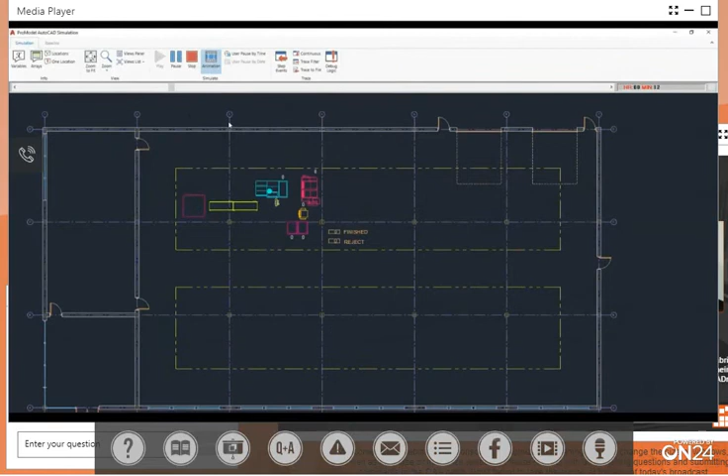So once the route is created and the flows are determined and the values have been added, you can use a tool called Simulate on the ProModel ribbon. This will actually simulate the route of that part or material going through the various stations. And in this case, finished and reject criteria have been set up.

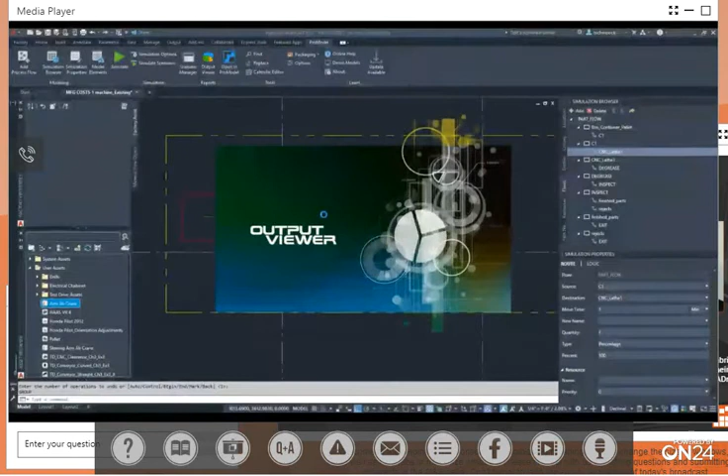I'm going to fast forward this to the end because I want to be able to lay out the various charts to get information that I can evaluate. So in this case, an output viewer will open, and charts can be created to suit the need that you have for identifying the proper information that you are trying to establish. And those charts are created using this tool right here.

So another simulation will be created adding a second lathe. We'll look at the results, and then we'll evaluate the results.

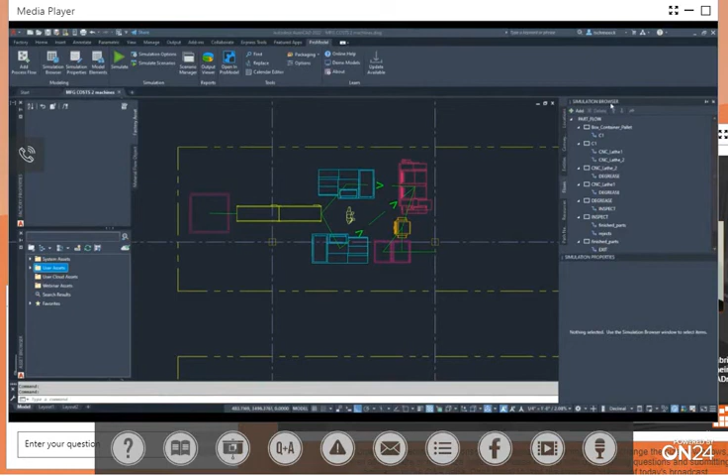The proposed layout of the two CNC machines has been completed. You can see the second machine is now added, and the paths have been adjusted. In the ProModel simulation browser, the second lathe has been added. The values have been adjusted.

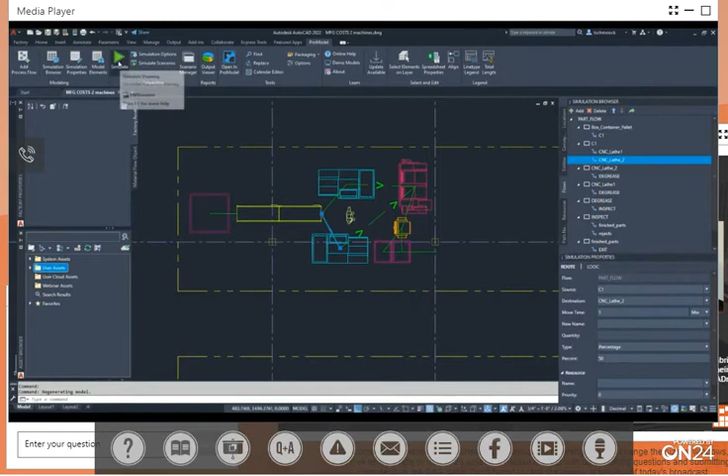So, for example, in CNC lathe 1, the percentage is now down to 50, and on lathe 2, the percentage of parts going through it is now at 50. Now that that is all done and any other adjustments were made by adding the second machine, on the ProModel ribbon, I can go simulate it using the Simulate tool.

ProModel shows the parts running through the route. The finish and the reject counts are being adjusted and displayed as the simulation progresses. I'll fast forward the simulation just like I did the last time so I can get to the simulation results.

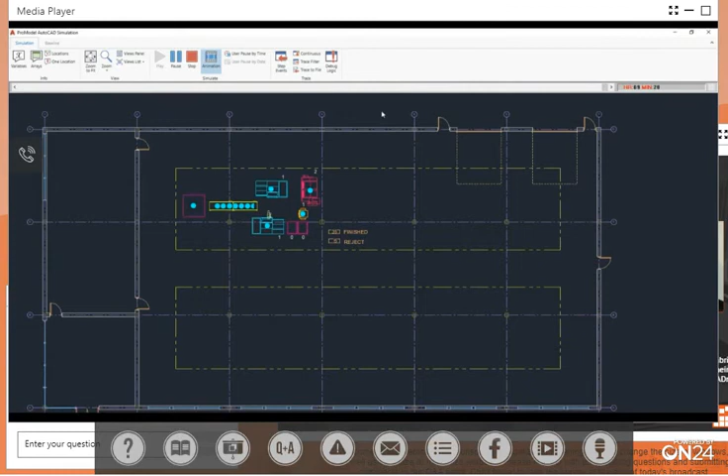The output viewer displays, and just like in the scenario where we had one machine, the same charts have been displayed, so now I can compare the results of the two simulations and evaluate whether adding the second CNC machine gives us the desired part output.

Now that we've run the simulations, we can open up our output viewer and look at both simulations on the same screen. By coming here to File and going to our data source, we can add our data source for the single CNC machine as well as the run with two CNC machines.

Now, looking at our report data, as we can see by comparing the two different results, we can start seeing how the second CNC machine, though we thought our operation percentage would increase, actually decreased, and we have increased our percentage of block time from a 26% rate to a 30.5% rate.

So let's look at the single capacity of the location. Right away, we can see that both of our box containers in Simulation 1 and Simulation 2 are very high, and we saw that while watching the simulation stack up on the conveyor belt.

But as we look, we can actually see that we have only decreased the percentage of block from 65% down to 64%. So it was only a 1% difference from adding a second CNC machine.

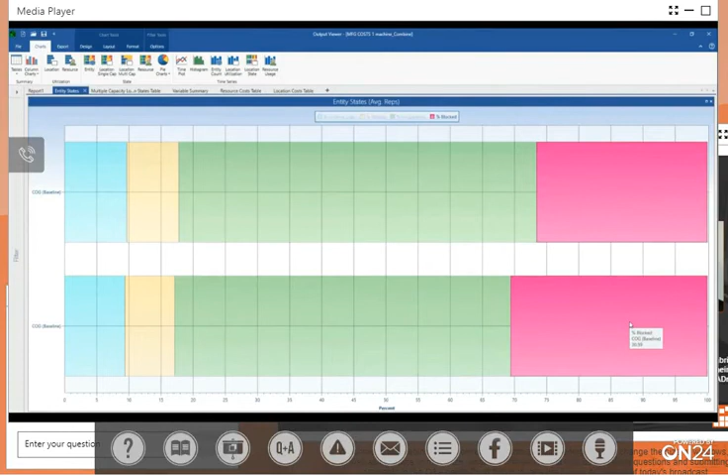Let's take a look at some states our machines were used to see what kind of usage they've got. If you notice our degrease portion of the process, it is only full 85% of the time. Only 12.21% are the parts occupying it, and the machine is empty 2.79%.

We come over here to our check system, and our check system is never full. We have 97.27 parts occupied at all times. So in other words, this is probably holding us up for the inspection.

So maybe what we need to do is add on a second person to the inspection site to alleviate some of the blockage. Now, one other thing I want to look at is our variable summary.

I want you to realize that when we only had one CNC machine, we produced 47.6 units, and we only had 6 rejected. When we added the second machine, it actually decreased our production rate, but it also decreased our rejection rate.

So in this case, we can start seeing how the resource of having just one operator doing the whole process might be overtaxing. But the other thing we need to look at is in our inspection or degrease process, we might want a different process here, or maybe add a station to help alleviate some of the blockage the CNC machines are causing. This might be what we need to increase productivity, yet keep our costs down.

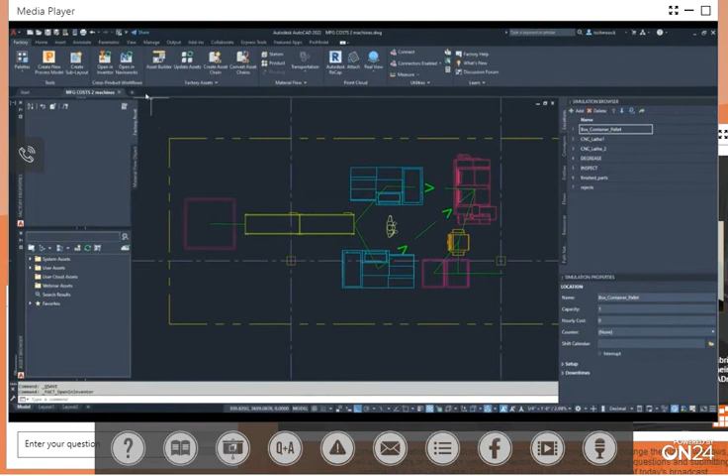So far, everything has been completed in AutoCAD. If you feel more comfortable working with Inventor, the factory layout can be completed in Inventor and opened in AutoCAD at any time. In this case, I started with AutoCAD, and I would like to open it up in Inventor. So there's a tool up here on the factory ribbon, Open in Inventor. Inventor will start, and it will create the factory layout as it was created in the AutoCAD software.

So you can see the factory floor now is displayed here in Inventor. The same CNC machine that I picked on last time, if I click that, you will see the factory properties displayed, the same factory properties that were shown in AutoCAD: the door open, true or false, and parameters for height, length, and width.

The same asset browser with the assets that were available in AutoCAD are available here: system assets, the ones that were out of the box, and all of the options you had there, and user assets, the ones that you would publish to. In this case, I have favorites created and populated with items I use on a regular basis. So maybe I want to take a fork truck from my assets and drag and drop it into my factory floor. I position it in the location and orientation that I want, and I can continue to add assets, dragging and dropping them where I need them.

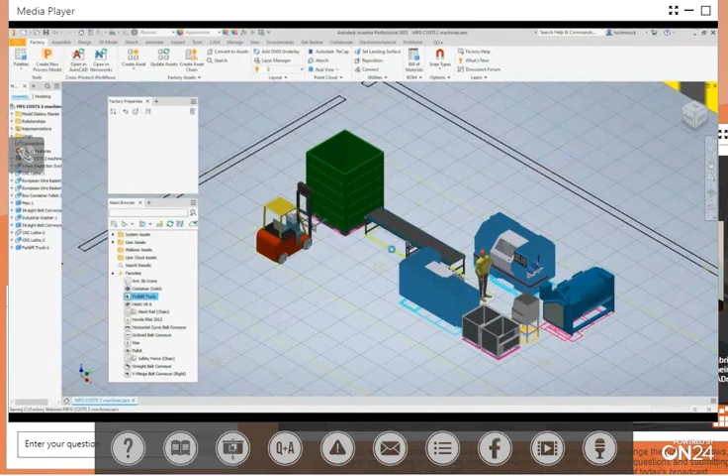When I'm ready, I can go back to AutoCAD at any time, so I'll use the tool Open in AutoCAD. The layout will need to be saved. And now we are back in AutoCAD, and you can see the fork truck has been added. At any point, I could move any one of these assets to a different location or remove them, save it, open it up in Inventor, and Inventor will be updated. So in any order that you prefer to work in, you can work in.

And at the very least, you may just want to work in AutoCAD, and the only reason you go to Inventor is to create a presentation for upper management.